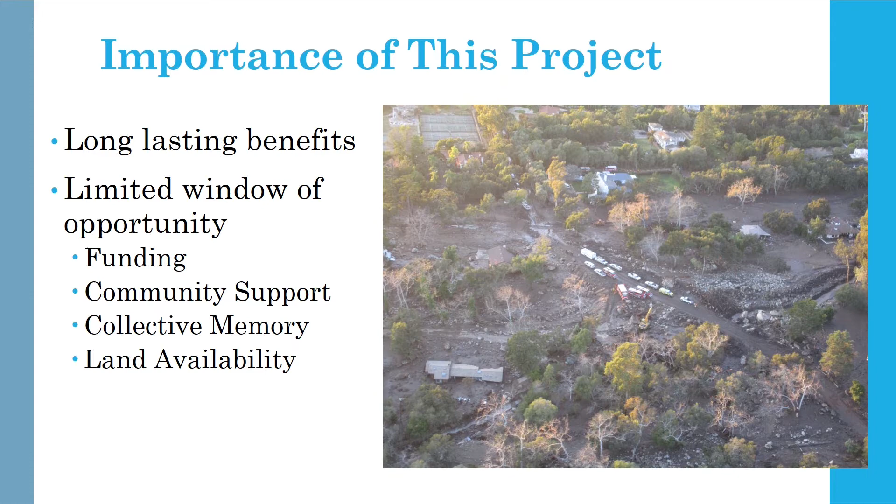And then just to counter what Curtis said, we can't do this without you all and without your cooperation and encouragement. A project like this would be a very difficult task without the assistance and all of the support that we've received from a lot of you. We'll receive some criticism on that too, and that's understood, and we'll do our best to address that, but we do appreciate all of your support.

So now I'm going to introduce John Fry, who's the engineering manager, and he's going to talk a little bit about the history of the area.

Thank you, Tom. And good evening. Thank you again, everyone, for being here.

So I just have a couple slides I'm going to go through showing the history of the area. I think most of you probably already know what the history of the area is, but the reason I have to have this piece of paper here with me is because I pulled out a 1974 Army Corps of Engineers report called the Montecito Streams, and they listed the documented flooding events that go all the way back to 1862.

So I'm going to tick these years off to you. And the point is going to be that it's not if a flood is going to happen again, but when, okay? And things go in cycles. So: 1862, 1909, 1914, '27, '38, '62, '64, '67, '69, '71.

The report was from 1974, and maybe Tom can help me out after '74. I know we had '79, right? '83. We had a couple big events in '95, '01, '05, 2010, 2011. And that's not even talking about what we just went through the past couple years.

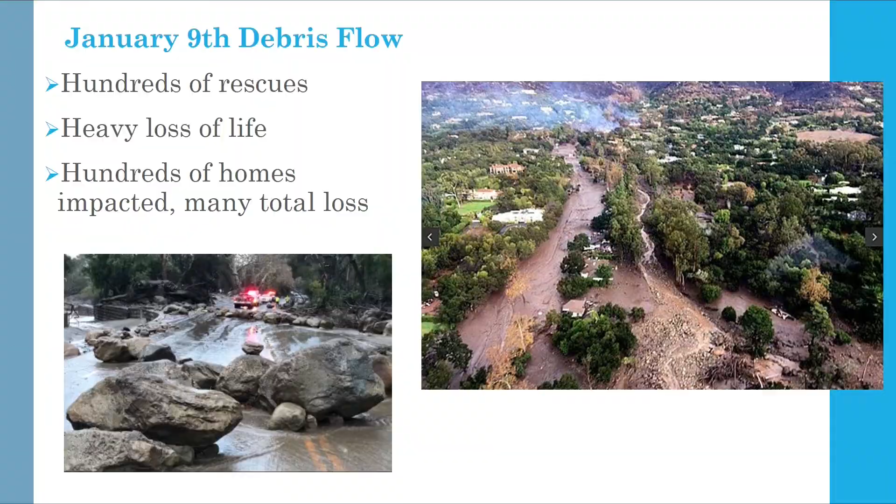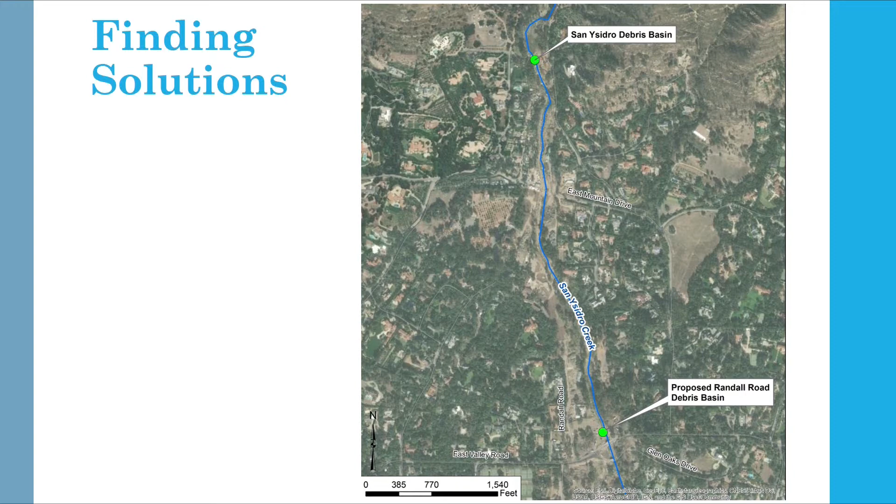So we're here to find solutions, as Tom has mentioned, as Supervisor Williams has mentioned, as Curtis has mentioned. The opportunity was presented to us along Randall Road—a perfect location for a debris basin. And that's what we're in hot pursuit of.

So I'm going to introduce Leslie Brooks. She is our design consultant working for a firm called WRECO. We have worked with them in the past very successfully. They designed some modifications for us on a debris basin we call the Gobernador debris basin. These modifications were built about 10, 11 years ago. Of course, we entered into a long drought afterwards, but it performed tremendously in the debris flow, and we're going to take that design and apply it to some other projects. But the point is, we've got a strong record of success with this firm. Leslie?

Thank you, John. All right, hello everybody. Like John said, my name is Leslie Brooks. I am the project manager for the Randall Road Debris Basin with WRECO. So I'm going to talk about the project goals, project challenges, and then our preliminary design and the considerations we have going forward with the design.

When we talk about the project goals, I want to make sure it's clear that Randall Road Debris Basin isn't going to be able to fix everything within the watershed. But we do see an opportunity with the funding and the land available to have a real positive impact within this watershed and for the downstream areas, so we want to take advantage of that.

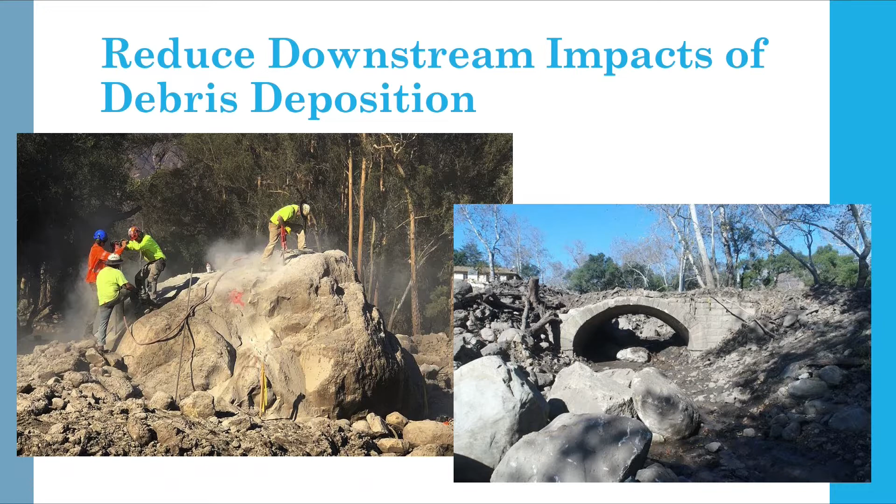The biggest goal is to reduce the downstream impacts of debris deposition. Everybody will recognize these photos from the 2018 event. You had really large boulders, large rock coming down through San Ysidro Creek and getting deposited within this area. It got choked off around East Valley Road, spilled over East Valley Road, and continued through the homes and neighborhoods there. So we want to focus on making sure we capture that large debris.

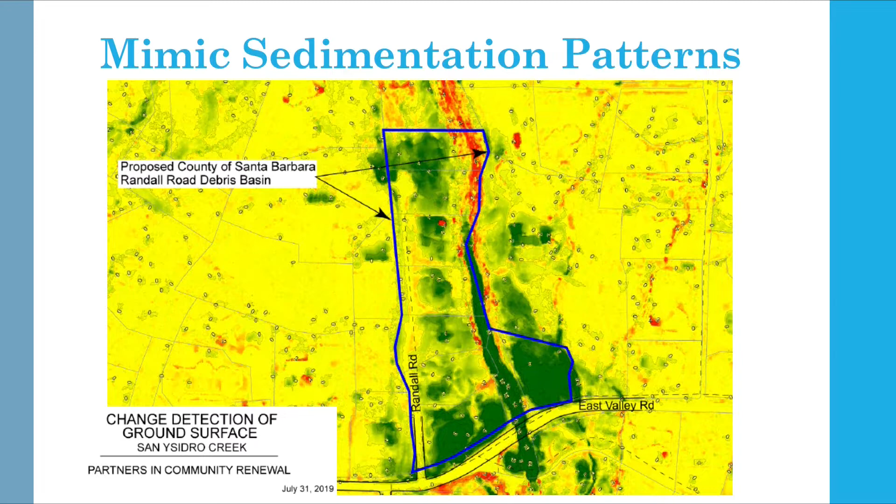Where we capture it, we want to take the opportunity to capture it in the location where it naturally wants to go. What we have up here is a change detection of ground surface, comparing the 2016 ground elevation to the 2018 post-debris-flow ground elevation. Everything in green is where sediment or debris accumulated. Everything in red is where it was scoured or sediment was taken away. Everything in yellow was very close between the 2016 and 2018 event. You'll see Randall Road running north-south here, and East Valley Road. This blue line indicates the outline of the proposed Randall Road debris basin, showing where we're trying to mimic that natural sedimentation pattern and use the area available to capture sediment where it wants to be.

Secondary benefits of the project include providing open space, which is a benefit to both the watershed and the community; increasing groundwater infiltration where we can through that open space; and then providing hiking access.

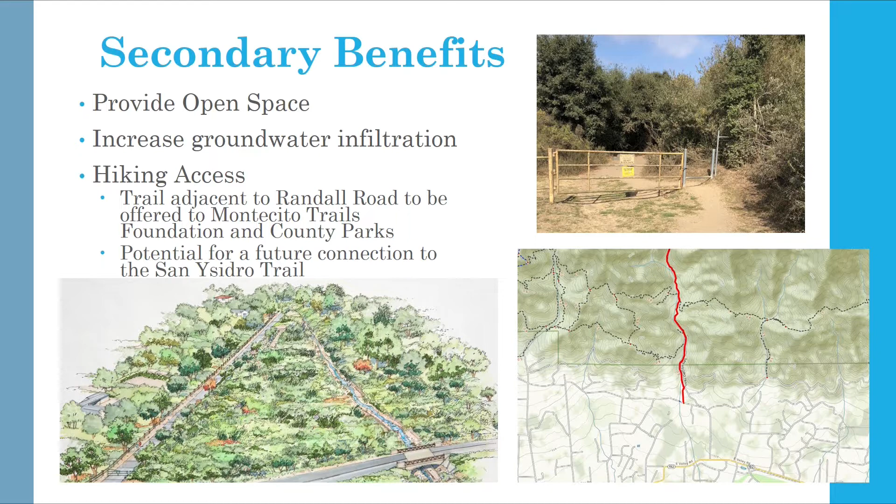There will be a trail adjacent to Randall Road that's going to be offered to the Montecito Trails Foundation and county parks. Here we have the San Ysidro Trail in red. Randall Road is just here, so it's not going to directly connect currently, but there is potential for a future connection to that San Ysidro Trail. Randall Road itself will be blocked by a gate, so there won't be vehicular public access, but the gate will have an opening for pedestrians and hiking access.

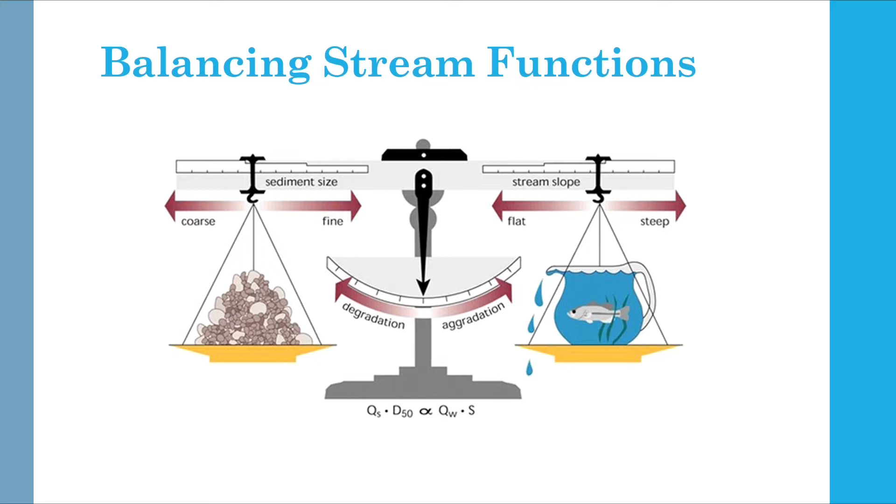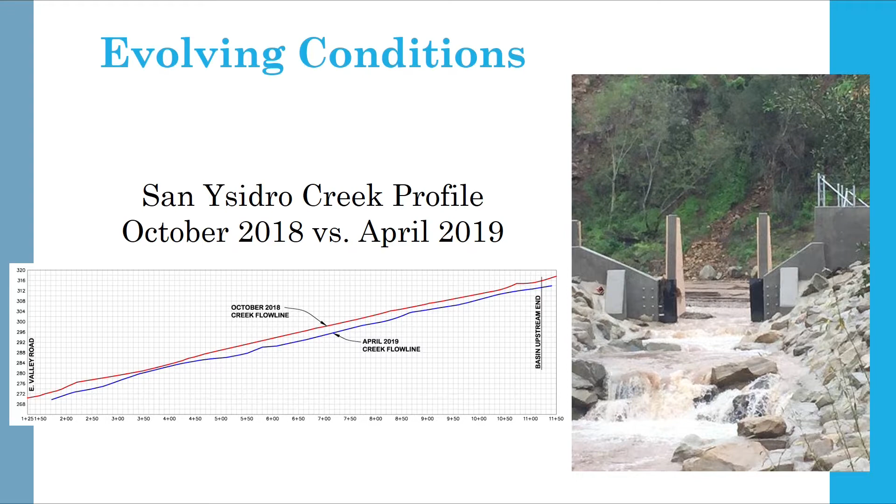So those evolving conditions are something we're taking into account. Also upstream, this is an image of Gobernador and the improvements made back in 2006 for that project. We're doing something similar on the San Ysidro debris basin. Right now it's just that solid rock embankment with the low flow channel, and we're moving to a more open outlet structure. What this does is allow a more natural sediment transport process, so you have those finer, smaller gravelly sediments continuing through the system. We're hoping that will help with some of the degradation happening downstream, so it won't scour as much there, because you'll have a more natural sediment transport. That in itself is going to have impacts downstream in the Randall Road area throughout that creek system as well.

There's existing utilities within the location. Along Randall and East Valley Road, we have water line, sewer line, gas line. We want to make sure the project doesn't negatively impact those. And while Randall Road will be closed off to public access, we will still need to be able to utilize it for fire, utility, and maintenance purposes. So that's another reason it's important to keep Randall Road in place. And then there are also fish passage requirements we have to look at for the stream throughout the length of the project.

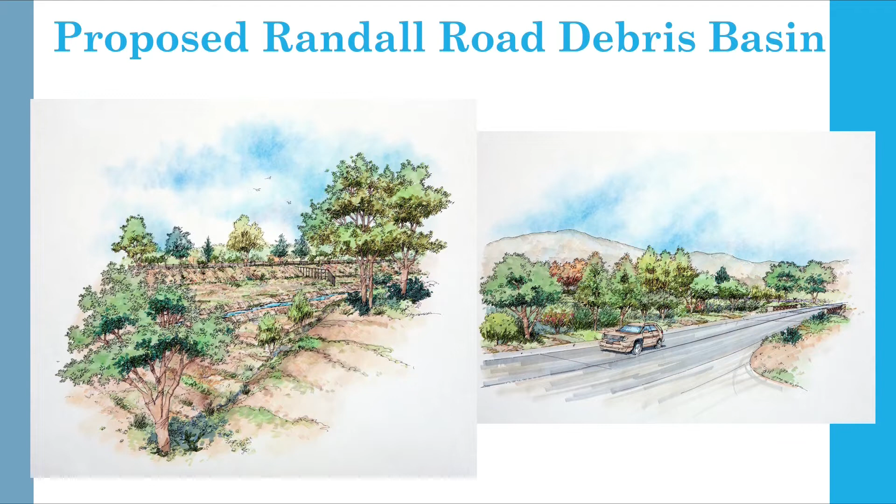Other design considerations include having an access ramp so maintenance crews can get down in there and clean it out when necessary, and debris racks that could help capture some of the larger debris. The real function is that as larger storm events come through, those flows widen out into the debris basin.

That widening of the flows makes the velocity go down. And as the velocity goes down, there's not as much energy for those larger sediments and boulders to continue through. So as the velocity drops, so do all the larger boulders.

We're still in the early phases, but we wanted to reach out during this early phase to get comments, input, and feedback. Right now we're continuing with the modeling. We have hydraulic models to run all these different scenarios, looking at exactly where we're going to bench off the stream and how big the basin can be. We're getting geotech reports in right now about what side slopes we can handle and things of that nature. But we do feel that with the preliminary design we have now, we can meet all the goals I mentioned earlier.

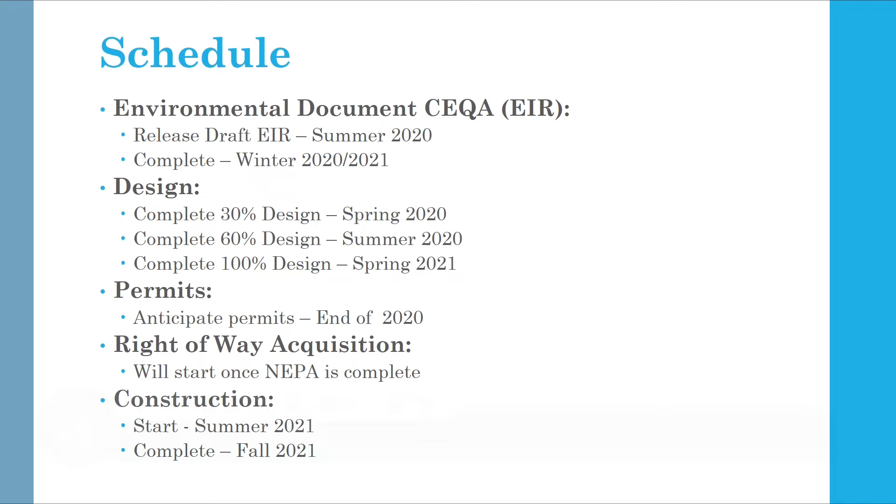And as I mentioned earlier, we are targeting a start of construction and a completion of construction in 2021. That is the schedule. We feel it's doable if everything lines up, and we're going to make our darndest sure that everything does line up with everything that's in our control.

Questions that are generated from this meeting tonight, that don't get answered tonight — maybe even those that do get answered tonight — we're going to compile them and post them on a link on our website.

And this presentation will be archived and available at any time that you might want to come back and view it, or inform your neighbors to come back and watch it. I believe I hand it back to Tom.

Thank you, John. So we're coming to the end here. I hope our message to you all — I've been with County Flood Control District for 33 years, and normally when we start a project like this, it's very incremental. And what you're seeing here tonight is we're all in.

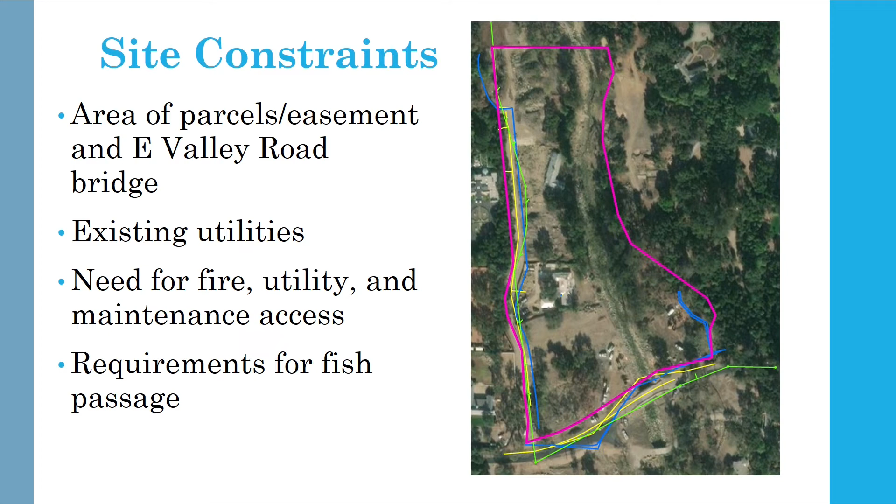So currently we own 2 parcels that are in there. There's a piece of county-owned property right next to the creek, and some equipment has been using that. We have purchased this house, called the Daniels house, and the remaining property is private property.

When we acquire the property, I think our first move will be to get rid of all the debris that we can. We haven't gotten that far on the construction planning, but my thought is we get rid of the debris through a demo contractor, and then the construction, moving earth and rock, would be a separate contract. Don't know if we'll actually do it that way, but if we do, we'll get rid of a lot of the stuff out there earlier, because there's still a lot of stuff out there.

It still looks like it suffered through a traumatic event, so I understand your question about wanting that to look better. But as it stands right now, we only own those 2 parcels.

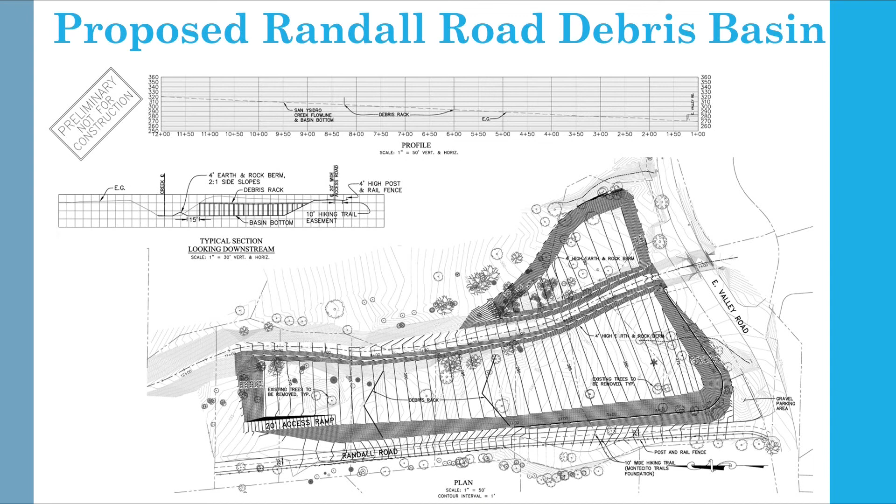Then you look at the problem in Montecito of the debris, which complicates where the water goes. You have two factors: water conveyance and controlling the debris. Debris control starts from the top down, and flood conveyance starts from the bottom up. So to start this, we're working on the debris basins we own and the ones we want to build. There's this one and the one on Buena Vista. If you look at the Board of Supervisors agenda meeting tomorrow, there's another grant we received, believe it or not, for Santa Monica, to improve Santa Monica from the Natural Resources Conservation Service.

But what we have been doing since the debris flow is finding out what we can go after and what we can deliver now, and we don't want to lose that opportunity. If we were to abandon this and say we're going to go for a Santa Monica type debris basin on San Ysidro Creek, I don't think you or I will be here to see it.